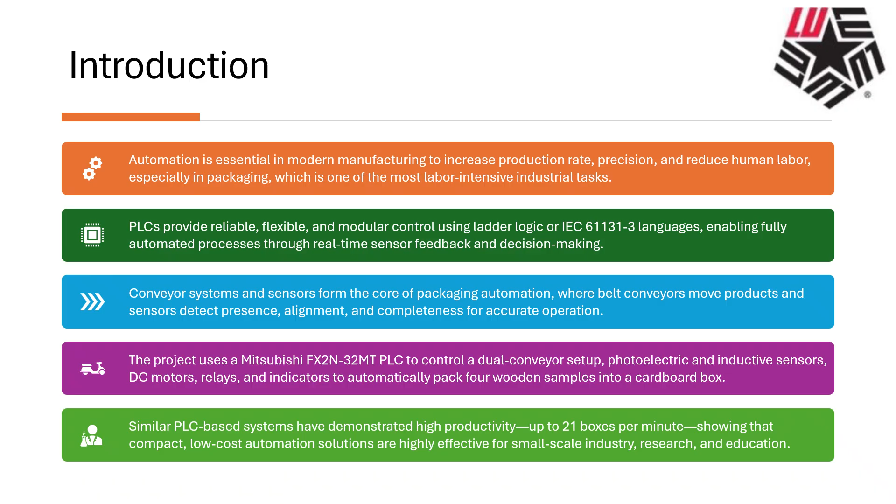In our project, we developed an automated packaging system using PLCs and various sensors. Our goal was to replace manual counting and packaging with a fully automated, accurate, and reliable process. Nowadays automation is really important because it reduces human error, increases production speed, and ensures consistent quality.

In our literature review, we studied several articles and papers published by other authors. These studies helped us understand that PLC-based automation is widely used in packaging, drilling, and sorting systems, and helped us understand typical components such as conveyor belts, sensors, robotic arms, and ladder logic. They also guided us in developing a safe and efficient control sequence for our own packaging mission.

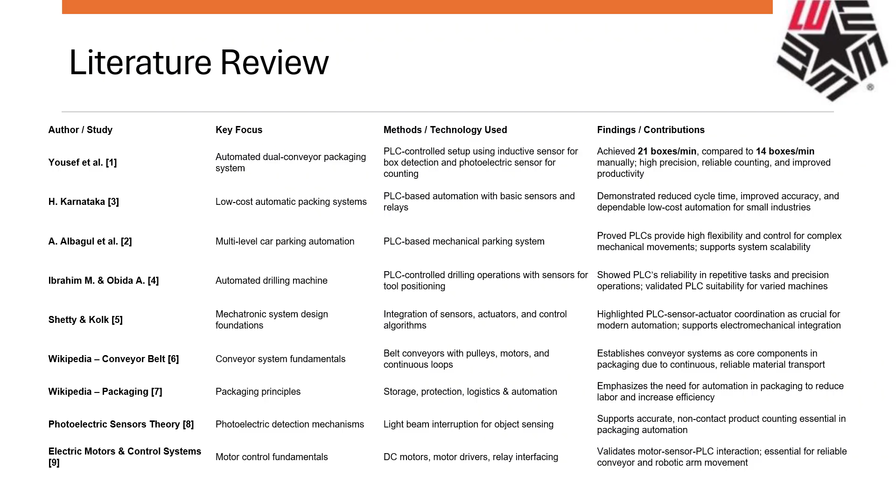I would like to explain one reference by Karnataka, published in 2014. It shows that low-cost PLC systems can still deliver high reliability when combined with proper ladder logic, interlocking, and noise filtering. This informed our approach to building safe start-stop latching and conveyor interlocking in our project.

In the methodology, we designed the complete system layout. The system contained a conveyor belt to move the products, photoelectric sensors for counting, a robotic arm for packaging, and a packaging-done sensor for resetting the system.

Once the layout was made, we selected the hardware and integrated everything with the PLC. Next, we developed the ladder logic in steps, starting from start-stop latching and conveyor belt control, and ending with the counter logic and robotic arm activation.

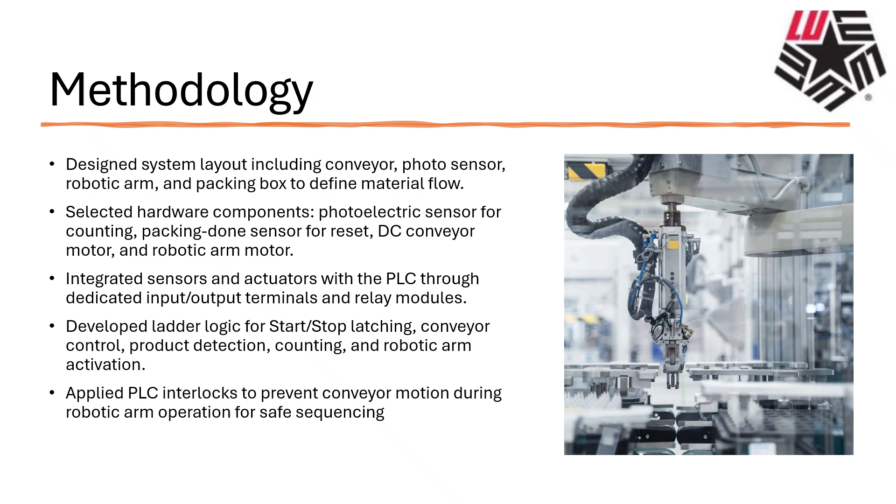We also included interlocking so the conveyor automatically stops when the robot is moving, ensuring safety. Here we implemented a CTU counter along with a one-shot pulse.

The ONS avoids sensor bouncing and ensures each product is counted only once. We also added a reset mechanism using either the package-done sensor or a manual reset button.

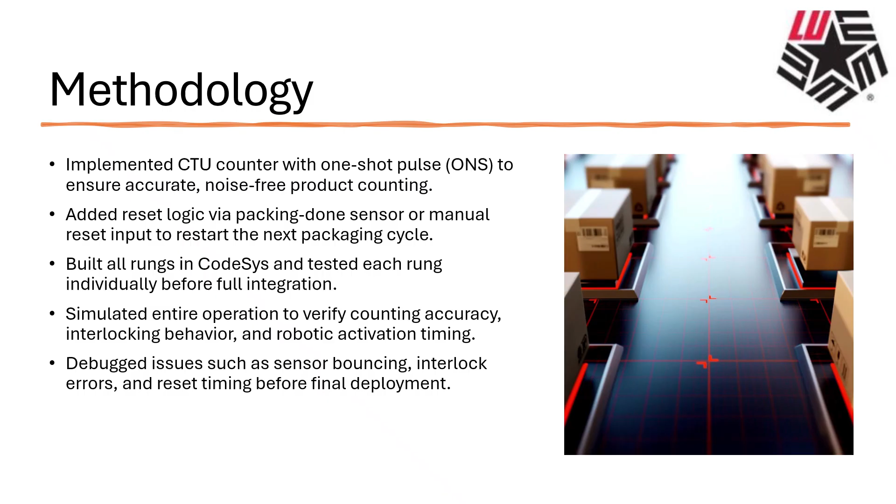All the rungs were built and tested individually in CodeSys before the system was run. We simulated the entire sequence and debugged problems such as interlocks, sensor noise, and timing issues.

The product is counted and the conveyor stops at the preset value, then the product is picked by the robotic arm for packaging.

From the next slide, my friend Tapusan will explain.

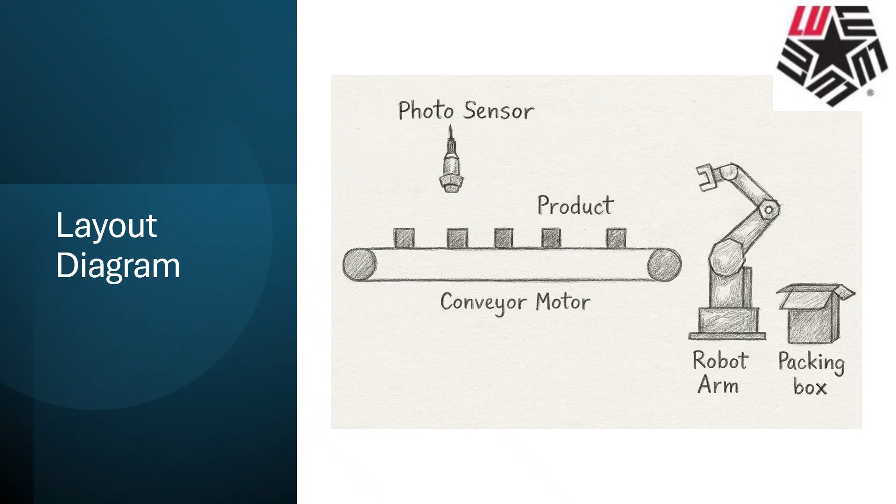The ladder logic includes several important parts. First, we have the start and stop control, which keeps the system running using a latch so the operator doesn't need to hold the button.

Next, we program the counter logic that counts each product passing through the photosensor. To ensure accurate counting, a one-shot pulse is used so the counter increases only once per product, even if the sensor stays on for a moment.

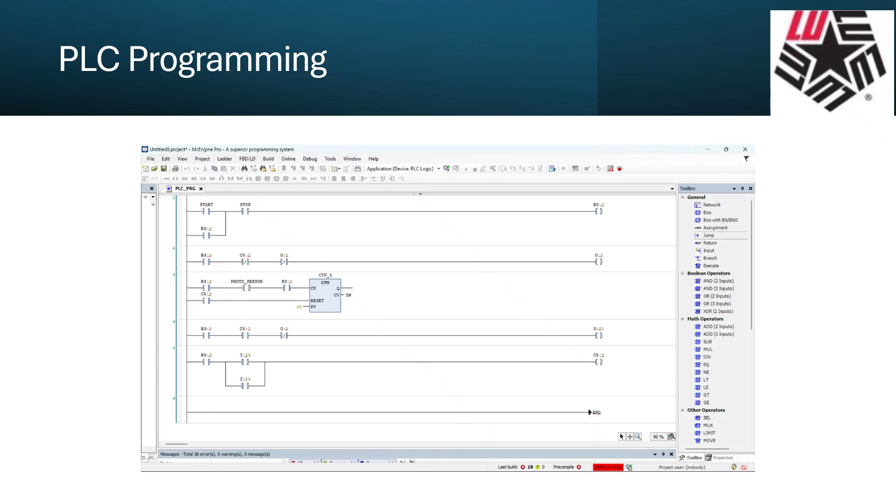We also include logic that activates the robotic arm only when the preset count is reached. Each rung in this program was created carefully to ensure the correct sequence: start, detect, count, stop, robotic activation, and reset. This programming ensures the whole cycle runs smoothly, safely, and without errors.

Next, we'll discuss more about the PLC programming. This slide shows more detailed parts of the logic, especially the CTU counter and the interlocking system.

The CTU counter increases by 1 every time a product is detected using the one-shot pulse. When the counter reaches the preset number, meaning the required number of products has arrived, the system automatically stops the conveyor, and the robotic arm is triggered to begin packaging.

The interlocking logic here is very important. It prevents the conveyor from running at the same time as the robotic arm. This ensures safety and keeps the sequence correct.

Once packing is finished, the reset signal from the packing-done sensor or the manual reset button clears the counter, and the system is ready for the next cycle. This slide basically shows how the system knows when to stop, when to activate the robot, and when to restart again without any manual counting or intervention.

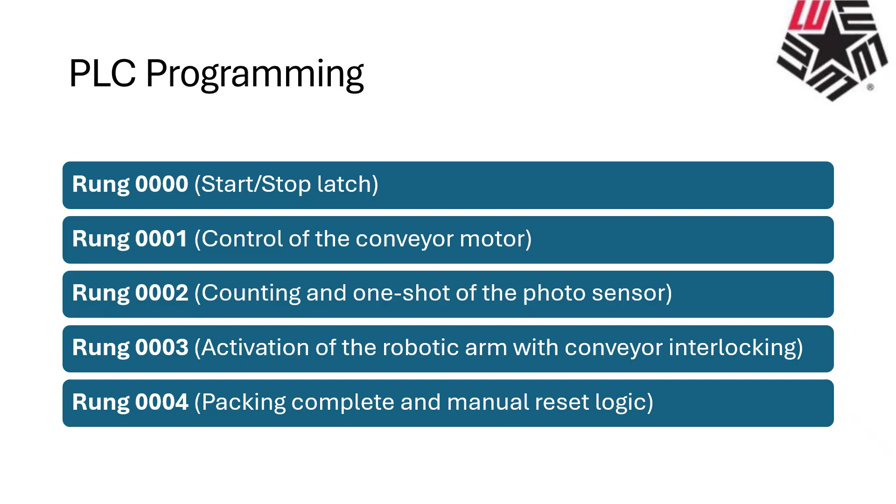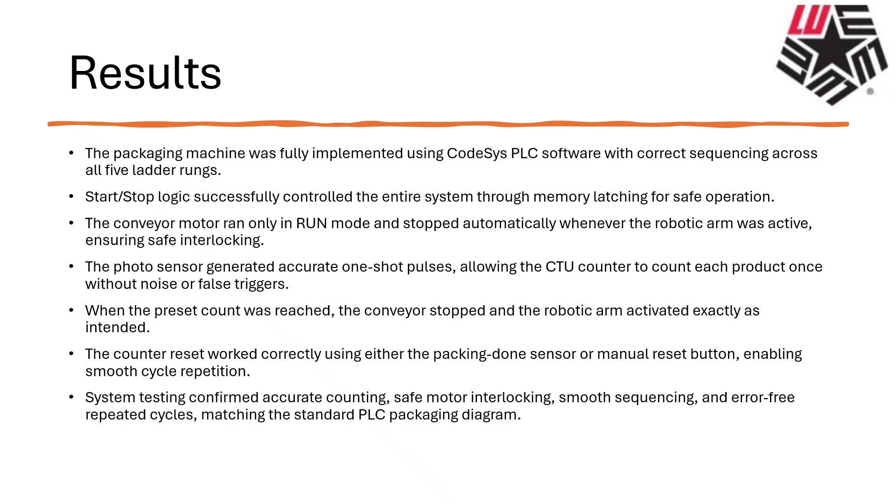The photosensor produced clean one-shot pulses, giving accurate product counts. At the preset value, the conveyor stopped and the robotic arm activated precisely. The counter reset worked perfectly, allowing the cycle to repeat smoothly. Overall testing confirmed accurate counting, safe operation, and reliable sequencing.

In the discussion, we highlighted the advantages of automation over manual packaging. The system provides more accurate product counting, reduces human error, shortens cycle time, and ensures consistent packaging quality. Automation improves efficiency and offers repeatable performance without fatigue.

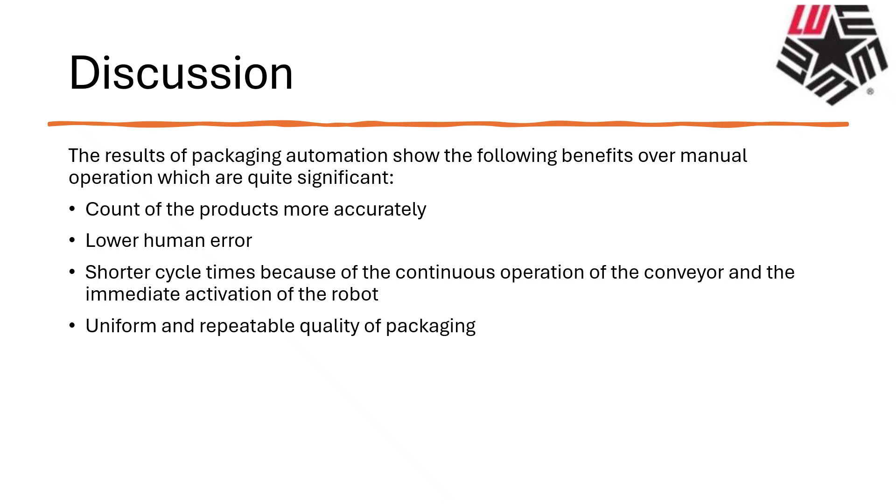In conclusion, the PLC-based automation successfully replaced manual counting and packing with a fully automated solution. The sensors and counters ensured accurate detection, while interlocks improved safety. The simulation and testing proved the system's reliability and efficiency, showing that PLC automation is effective for small-scale packaging operations.